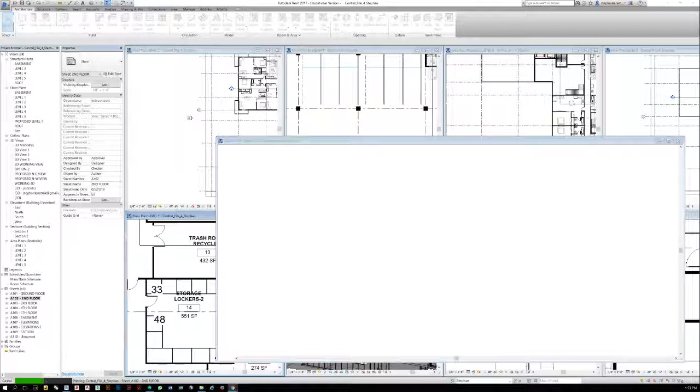So before I had them staggered, so I straightened them all out. Yeah, so now you have a continuous shear wall going all the way through. Can you point it out just so I understand what you mean? So this would be your shear wall. Right. Which one, going all the way through, H or G? Well, there'd be one on G, one on F. I kept them coaxial for both suites. Yep, I understand.

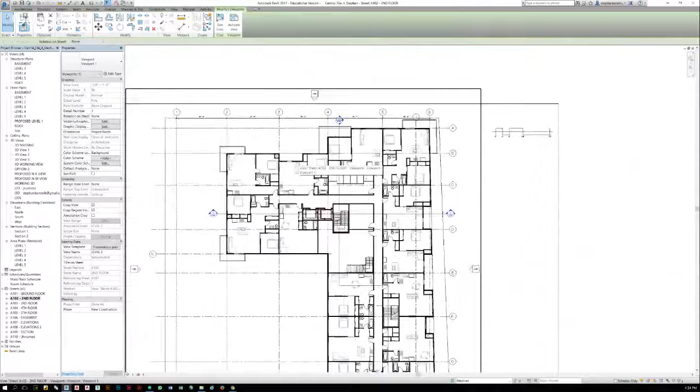And then what I was thinking is the interior corridor wall would be completely mass timber, because I don't need that many penetrations anymore. For the doorways we could do that out of mass timber, and then for the balconies go with prefab panels. I see. And same for the front, because it's a little bit complicated, because we have a foot overhang off the first floor. If we need a load-bearing wall, we have to figure something out in terms of transferring down. But if it's a lighter frame, we could probably use some kind of bracket system that could hold that weight. Mm-hmm. Yeah, I'm comfortable with that. Okay.

Same thing for the balconies, because originally Professor Farrow asked me how we can support those balconies, but since now we're using mass timber, those faces we could actually anchor. Could you repeat that, because you broke off? Oh, sorry. You actually anchor what now?

So since now we're using mass timber for the exterior, we can technically anchor off it a lot more structurally soundly than other construction. So would they hang or support off of brackets from that wall? Yeah, thinking maybe using a moment connection on that, like a bracket into the interior. Gotcha. We'd have minimal thermal bridging, but we could tie off, put some kind of beam on with the CLT without any thermal bridging. Gotcha. Actually, I think I have an image of what I was thinking, if you bear with me.

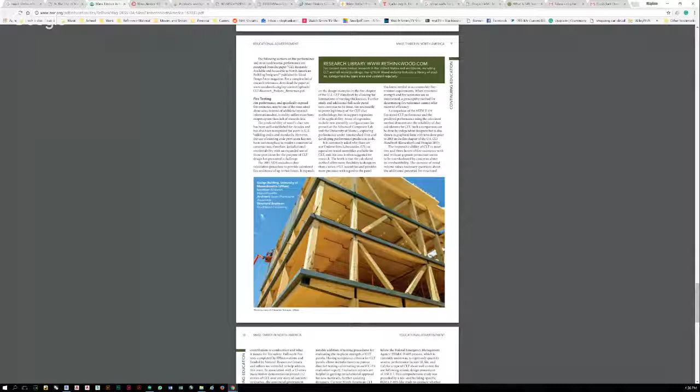Well, this is really exciting to see this. Where is this building? This one is in University of Massachusetts. If you want, I could send you the article. Yeah, that would be good. Please do. Okay. Yeah, this article actually has a lot in terms of.

There is a brand new mass timber building. I think this is it here. No, I think it's in New Jersey. It was just in ArchDaily or Dezeen.com about a week ago. I'm not going to remember who the architects were. Shoot, but you could look it up. They're doing several 8, 9 story buildings that look like this image here, quite honestly, and the firm might be someone you can contact, who might be interested to talk to you about it.

You said it was in New Jersey, possibly, right? I thought so. Yeah. I'll look it up too. If I find it, I'll give it to you. Okay, I'll take a look at it tonight once I get home. Cool. Okay, sounds good. What else do you want to go over?

I think the question is, I wasn't sure if it'd be okay to kind of mix and match. Yeah, a hybrid is really the way to look at this whole thing. Okay, perfect. So yeah, that simplifies it. The only way I wouldn't do hybrid is if I was doing a post-tension slab for all of the residential and the first floor. But even then, I would be doing cast in place without post-tensioning for the walls and the footers. So it would still be a subtle hybrid approach, but I still think it's a hybrid all day long.

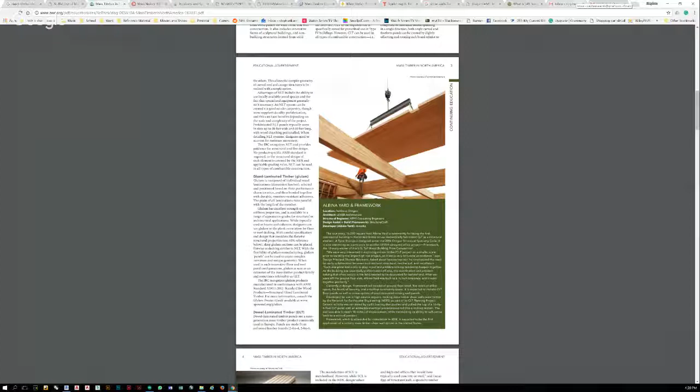Well, send me that. That sounds really interesting. Okay, perfect. Yeah, send me an example of that. I'll send you the TED Talks where they explain it. Cool. Doris Kim Sung. Basically, it's two different metals that react. So it would close the apertures or open the apertures. How interesting.

I don't know how far we push this project in terms of thinking outside the box. I know we have a program that we should kind of follow. Yeah, I think you can go above that, and honestly, when we get to the last benchmark, the grade sheet and the assignment will allow for and encourage you guys to pursue options to enhance your grade, right? In other words, there's definitely room and incentive to do things above the base program. So I'll encourage that. That clears up a little bit of confusion that I had. Sure. I think that's the majority of it.

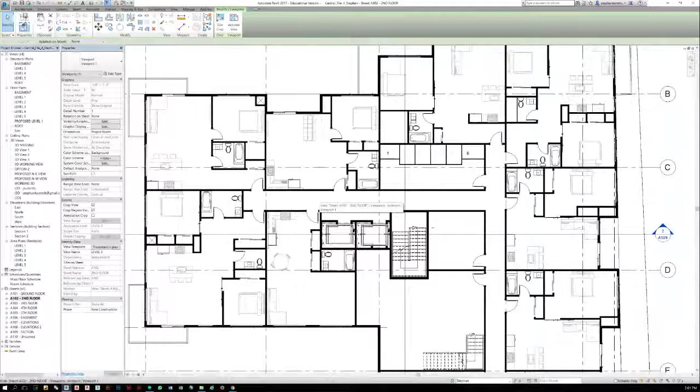So I just went back to the drawing board and tried to rearrange some of the suites, like you guys said, to keep them a little more consistent. Some of the bedrooms are still pretty big. The one at column D is still big, and I'm wondering if that bed could slide further to the window, and then that closet be a walk-in. Okay. That kind of thing. You never want the rooms to be that different if it's possible. All of the bathrooms for you are about the same size, and that's good. But if you can get walk-in closets in the bedroom, even if the bedroom has to shrink, that's actually a good thing to do.

Okay. So that bedroom's closet could grow in the easterly direction and in the southerly direction. And if it could be two closets, like she would get a walk-in and he would get a reach-in. Okay. That kind of compartmentalization, that works too. Okay, that makes sense.

Notes so I remember this. Yep, that's it. And suddenly, you know, she's got a great closet. Exactly. That's a great approach. And then he gets his closet door just as he walks in, and you know, she walks around. And then the bed slides over and sits in the middle of that leftover distance.

And you're okay with having like a barn door that slides behind a couch for visual? Yeah, I have no problem with that. That barn door can slide either way, but yeah, I have no problem with that. Okay. Because the seating group could go on the other wall in this instance. Oh yeah. The only thing I was kind of hesitant is because we have the balcony over here, and I didn't want to move the couch over on the other side. Yep, I understand.

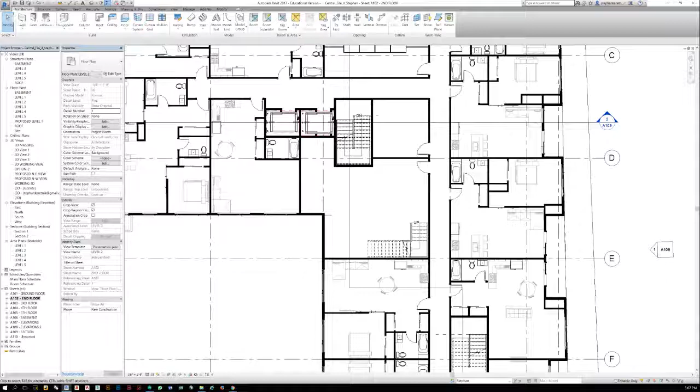And then for IT, you like going throughout the entire building, I'm assuming? So for IT, you might have something in the basement, you might have something on the ground floor, and then what usually happens is that stuff may home run in that area where you've got the stairway in that inside knuckle area. But most of the IT stuff is going to be hanging in trays in the corridor. Okay.

Corridors are usually unfinished ceilings, okay. You might have like plywood clouds hanging down in intermittent sort of rhythms rather than one continuous suspended hard ceiling. That keeps the ceiling seemingly pretty high. That allows mechanical ductwork to drop down easily, sprinkler heads, right? Access to IT conduit, low voltage wiring and the like.

But I wouldn't propose concealing that ceiling. And given the structural system that you're proposing, revealing all that structural architecture could be kind of pleasant. Okay. Right? Yeah, I could maybe do some kind of basic suspended area just to cover off some of the areas that we want to cover. Yeah, but I actually advocate for seeing and revealing that stuff. There's something direct, blunt, honest about that.

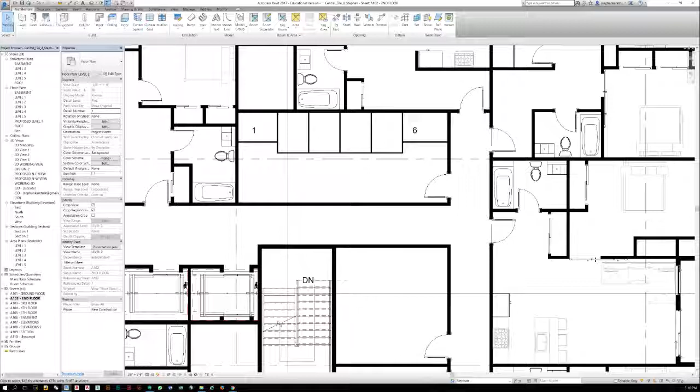That's my 2 cents. And the very last thing that I have is: are you opposed to having storage lockers on each level? No, I think honestly, homeowners would want them on the floor that they're living on. Okay, max them out. Well, you can get 12 up there. Okay, I could give it a try. It might be a little bit tight. Well, no, you stack one above the other. Oh, they're those kinds. They're more like dog kennels, right? All right, now I know which ones you're talking about.

So you're gonna have like a 9-foot ceiling in there, so you got two 4-foots, one sitting on top of the other. Oh, okay, so I was thinking of the wrong units then. Well, I think it's just chain link fence, with posts and gates and padlocks, with maybe a plywood sheet for the floor. So you can put your summer stuff in there when it's wintertime and vice versa. And you have a lot of room in there. You could leave like a 4-foot corridor in that room and put 5 units on the long wall and maybe 2 or 3 units on the short wall.

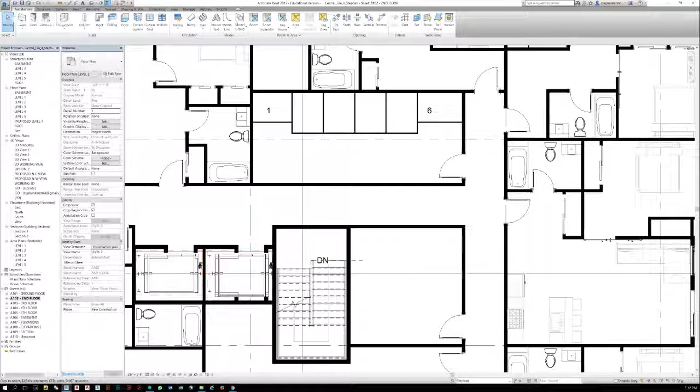Or put 4 units on the long wall and 3 units on the short wall, so that you can circulate around and maximize. So yeah, you could get 14 units in there easily, I think. How many apartments do you have? Right now, 14. So if you can get 14 in here, that would be ideal. Perfect. Okay. So now it makes it a lot easier if I could stack them. Yeah, they're stacked and they're like 3 by 4 by 4 tall. Perfect. That makes it so much easier.

You could even do one for the building facilities team, that kind of thing. Are we required to have a janitor closet per level? You should include one. Okay. It can go in this storage area. It could go near the laundry. It could go behind the elevator, for example. Or it could go in that hard knuckle, that big square of a space east of the stairway. Okay, because I was thinking of doing the laundry there. Yeah, but even that could be a smaller closet. Could be 3 by 4, 4 by 4.